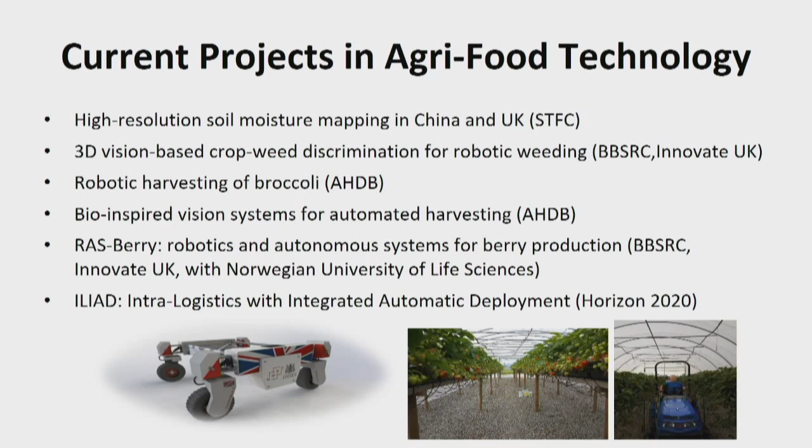Let's look at how this technology might develop and where it can go. One of the underlying questions fundamental to this research is, can we make our agriculture more efficient and sustainable? We're faced with a growing worldwide population.

We basically need to grow more food and other crops as well, biofuels and so on, with existing resources, and we need to feed a growing population. So how do we do that? How can we scale up the agricultural systems we have now to produce more with the current resources?

Well, to try and look to the future, it's good to look to the past. If you look at the development of agricultural machinery, it started off in antiquity with the invention of the plough, and that was pretty much the state of the art for thousands of years until the Industrial Revolution, and then came along steam power, and then we got to tractors.

The trend in recent years has been towards bigger and bigger tractors. This is the way to scale up the technology, to build bigger and bigger machines. But there are a number of issues with this.

Soil compaction is one issue. Reliance on fossil fuels is another. So is this really a sustainable long-term solution?

Well, together with a number of colleagues that I see sitting in this room, we think there is an alternative, and that's to build autonomous robots. So rather than scaling up by building bigger and bigger machines, you could have a fleet of more and more smaller robotic systems which could function off electric power, which could potentially do the job even more efficiently.

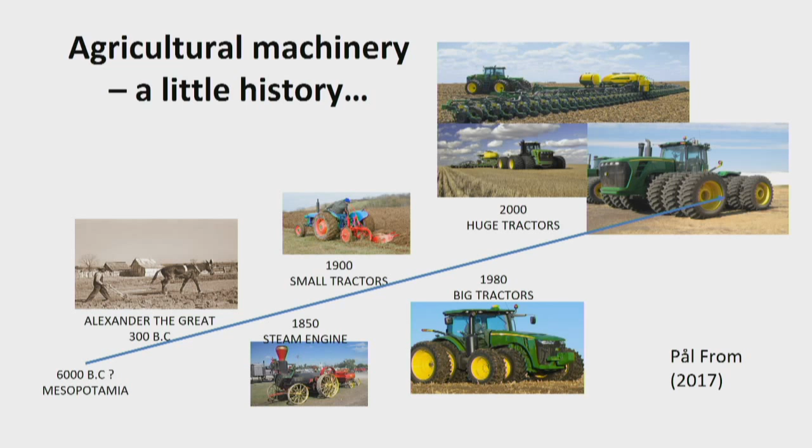Just to mention how this is going to come about, the technologies I'm going to talk about today require platforms to run on. So probably the closest route to market would be to basically retrofit existing farm vehicles. Colleagues at Harper Adams University have been very successful and are very good at retrofitting, at roboticizing farming vehicles. And this is an example.

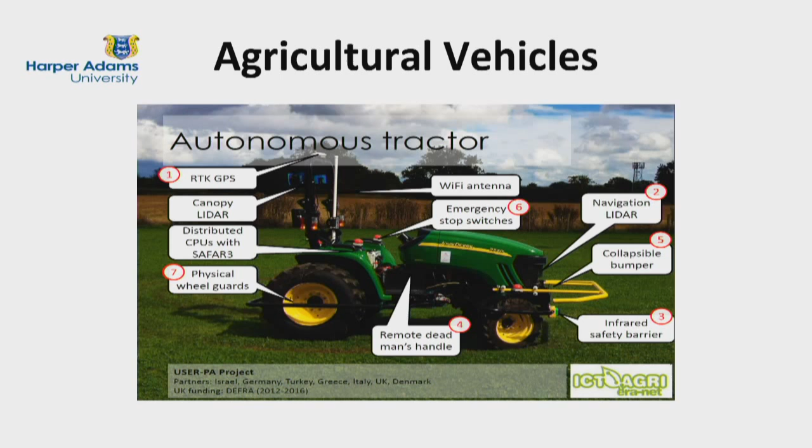It's one of your slides, Richard. I'm not sure from a recent presentation of an autonomous tractor. So I think in the short term, the robotic technologies I'm talking about tonight will be deployed primarily on existing farm vehicles, tractors, sprayers, or whatever.

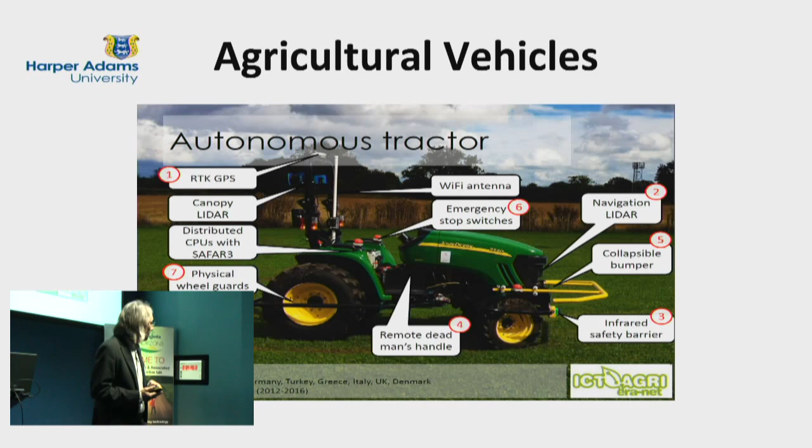In the longer term, I think we can also see something like this. This is a lightweight, electric-powered mobile robotic system. It's one that we're working with now at the University of Lincoln, and it was actually developed by our colleagues at the Norwegian University of Life Sciences.

This is work done by Professor Pål From, who's now a part-time professor at the University of Lincoln, as well as a professor in Norway. I'll just show you a couple of videos of our robotics platform, which is called Thorvald, just so you can see it working.

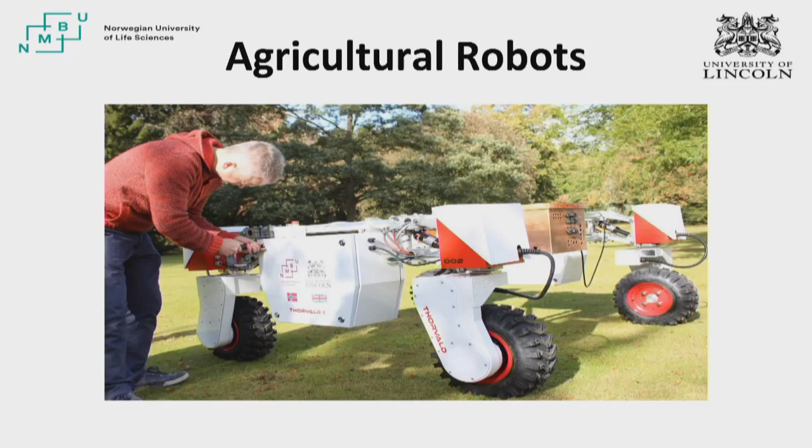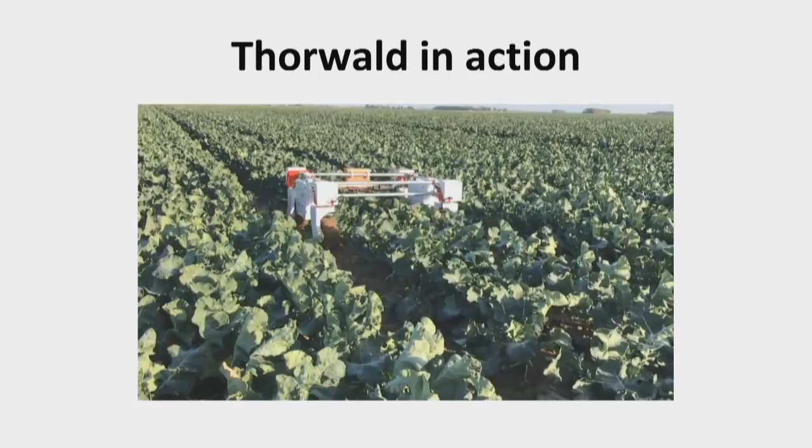So basically, this is a mobile robot. It has a battery life of around 12 hours at the moment, but that depends on the payload and the operations you're trying to perform. It has 4 independently powered wheels, and there you can see the robot in the field. Is that broccoli? It looks like broccoli to me. So there you can see the mobility of the platform, and there's actually a similar sensor to this one mounted on the front to do some measurements.

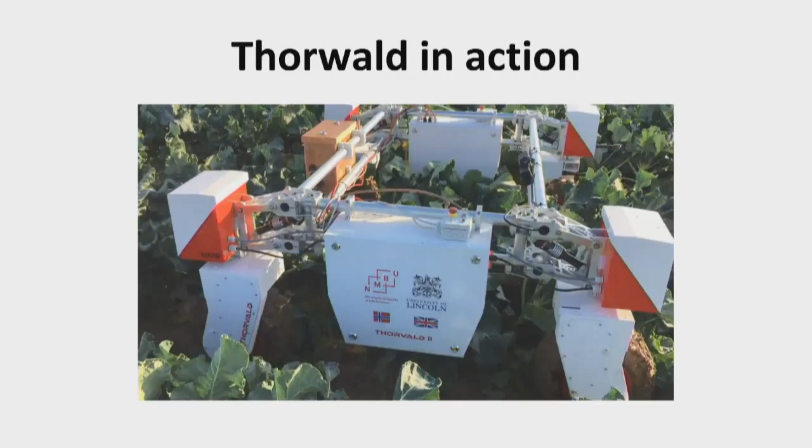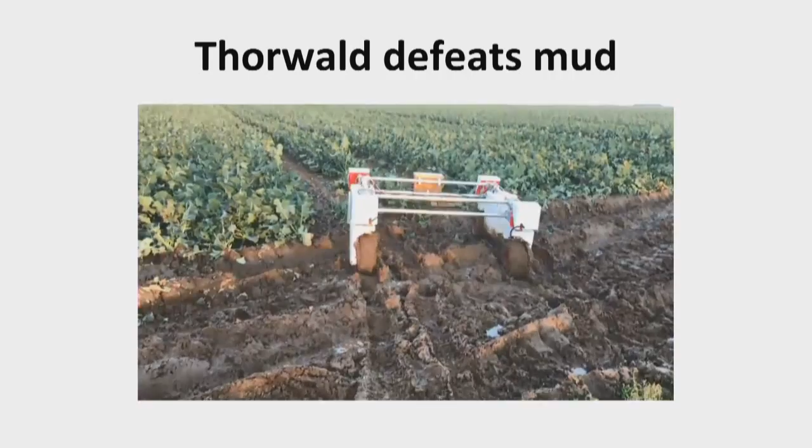Let's go to the next slide. This is quite a good indicator of how the system will deal with very muddy conditions. This is a field somewhere in Lincolnshire. The system is quite manoeuvrable and is able to cope with quite severe levels of mud.

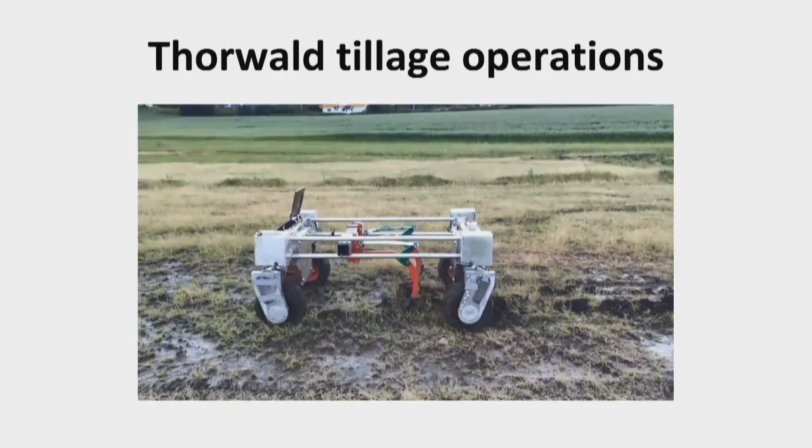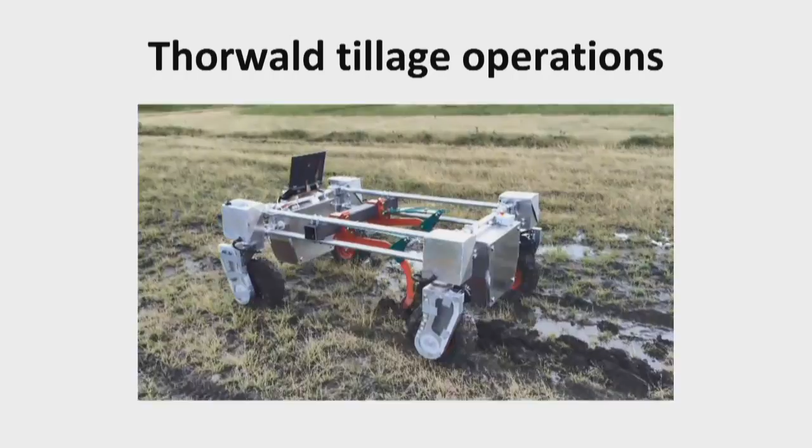In fact, I've got another video from Paul in Norway. This one was filmed recently, and there's a robot doing some tillage operations. You'll notice the conditions there are rather wet. In Norway, they apparently have a 2-month growing season, and it rains nearly every day.

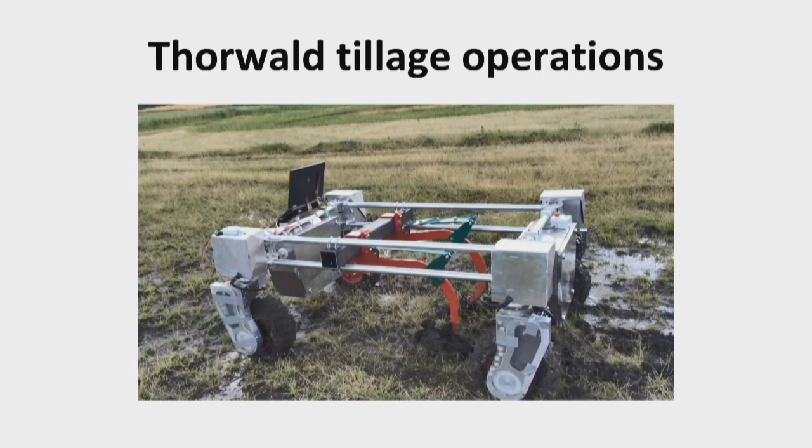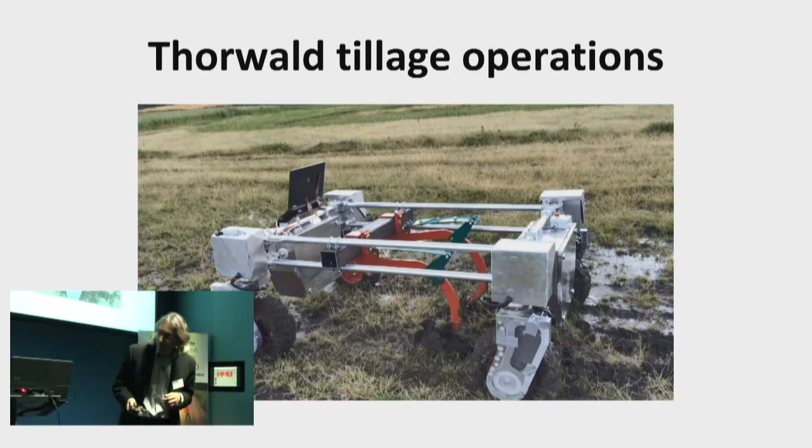Finally, just to illustrate the payload, we're told our robot can carry 200 kilograms. I'm not sure exactly what the payload is here, but we got two of our colleagues to sit on the robot, just to show you that it's quite robust and reliable as a system.

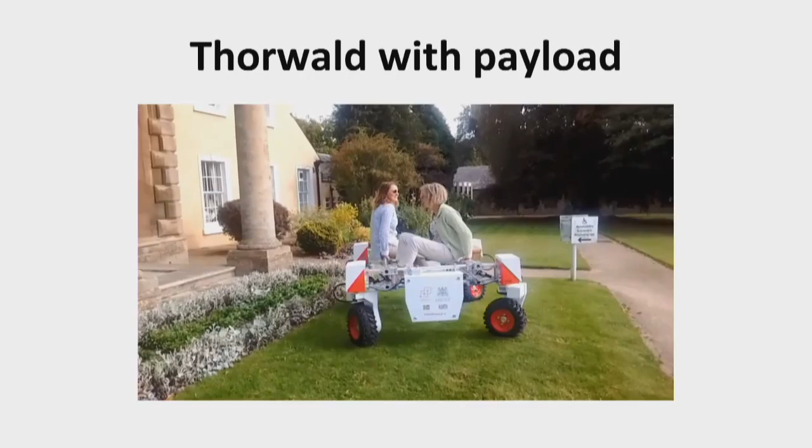Okay, so that's our robot Thorwald. Try to remember what's coming next. So Thorwald is a nice piece of hardware.

It's got great electronics, and some onboard controls, fairly low-level, for example for controlling the 4 wheels together. But all of the demonstrations you've just seen had high-level control done by a human with a joystick, someone standing there driving the robot by hand.

So if we want to make the robots autonomous, we need software. Hardware and software are the two sides of the coin in robotics. You need mechanical and electrical engineering to build the hardware platforms, but then you need computer scientists to do the coding and develop the software to make the systems autonomous. That's where I think robotics can add something to the agricultural world.

Basically, all autonomous robot systems operate on a sense, think, act cycle. They have sensors, like the one I showed you, to interpret and make sense of the world. Then they have to do some thinking, reasoning - it might be decision making, it might be planning, working out the sequence of actions needed, for example to remove a weed or reach a certain point in space. And then they need actuators, motors and implements, to actually carry out the motor commands.

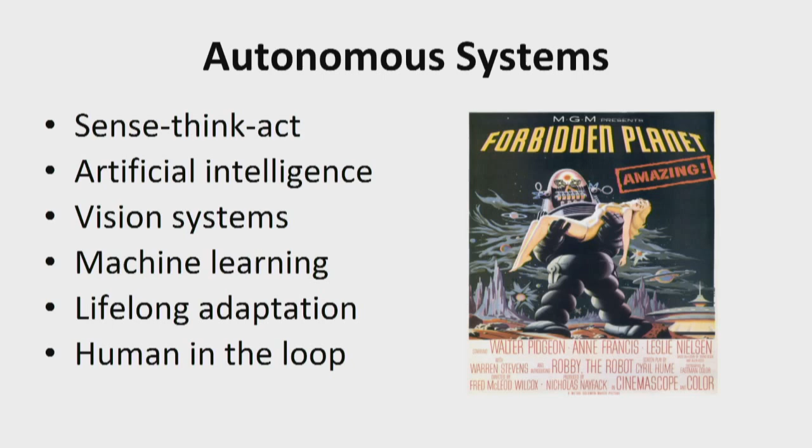But as I said earlier, I don't think we're going to be looking at fully autonomous systems anytime soon. I think for the next generation of farming robots, there will usually be a human in the loop somewhere. You may have heard one of the buzzwords going around at the moment, Industry 4.0, or Farming 4.0, which is supposedly the fourth industrial revolution. They talk about cyber-physical systems, meaning systems that contain a human element and a robotic element. So I think this is the future of agricultural robots—will involve robots, but also a human in the loop somewhere.

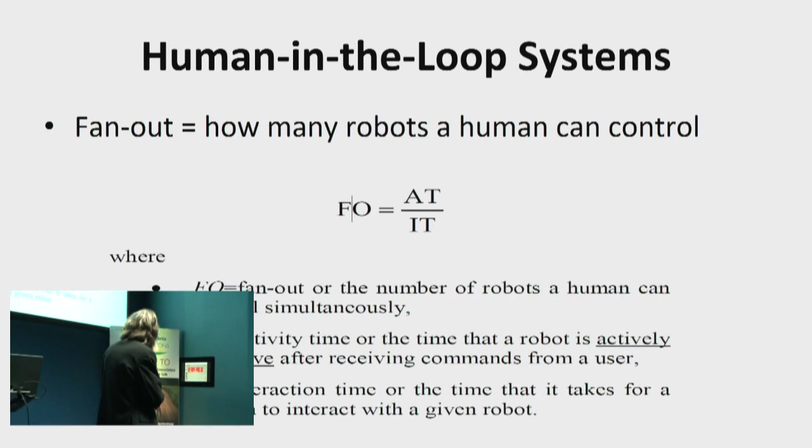I was told you shouldn't ever put equations in a presentation like this, but, well, sorry. One useful concept is Fanout, which means how many robots can a human control. There are a couple of factors that can influence this.

One is the activity time, the amount of time that a robot can run without assistance. If you can increase that, then you increase the fan-out, the number of robots that a person can control. But the more time you have to interact with the robot, the fewer robots you can deal with.

If you look at some of the currently remote-controlled systems, like drones in military applications, they actually have a very low fan-out—they need more people than robots. But I think in the future you're going to see robots with a much higher fan-out, so one person can potentially control many robots. We need this, of course, to scale these systems to work on a higher volume.

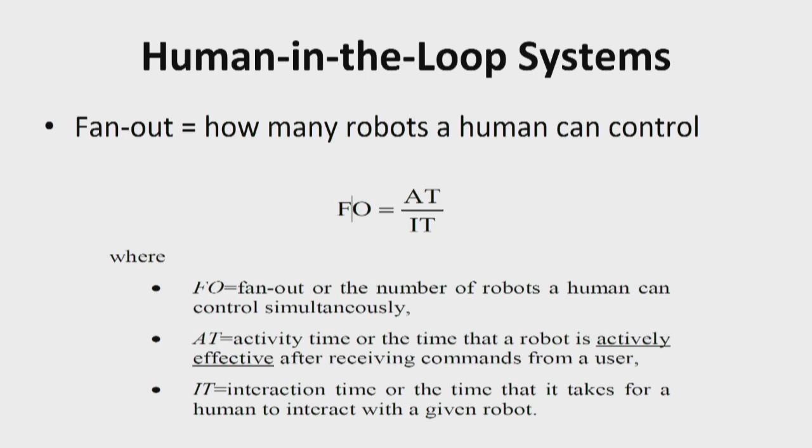Hopefully I'll give some examples and motivate how we can possibly do this in robotics for farming.

I'm going to talk now, to illustrate some of this stuff, about some case studies and some of the projects we've worked on in the past few years. The first one I'm going to talk about today is robotic harvesting of broccoli.

Broccoli is an interesting crop because it's harvested selectively. Some crops undergo slaughter harvesting, where you basically make a binary decision—you either harvest the whole field or you don't. But with selective harvesting, you might make several passes through the field, and you only harvest the crop when it's ready, when it reaches a certain specification.

These people literally use their left hand to hold the broccoli, the right hand has a big knife. They'll check the specification of the broccoli—basically determined by the supermarkets—is the head within a certain size range, a minimum and maximum diameter? Then they'll cut the crop and put the cut broccoli head onto a conveyor, and it will go into the back of the tractor. Currently you typically have one person driving the tractor, and then a gang of 6 laborers.

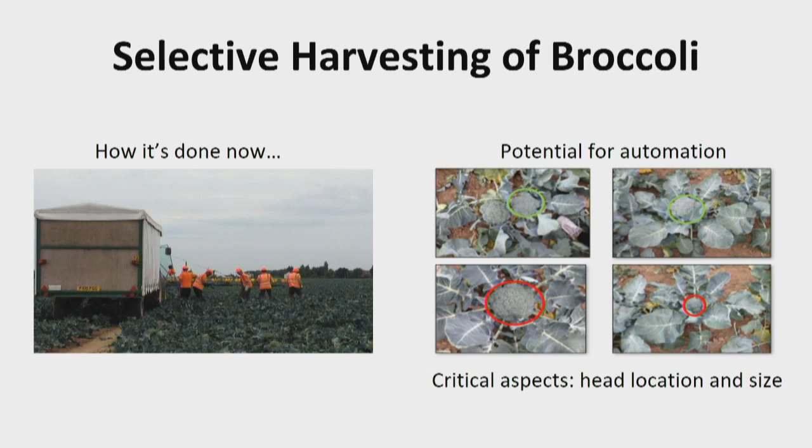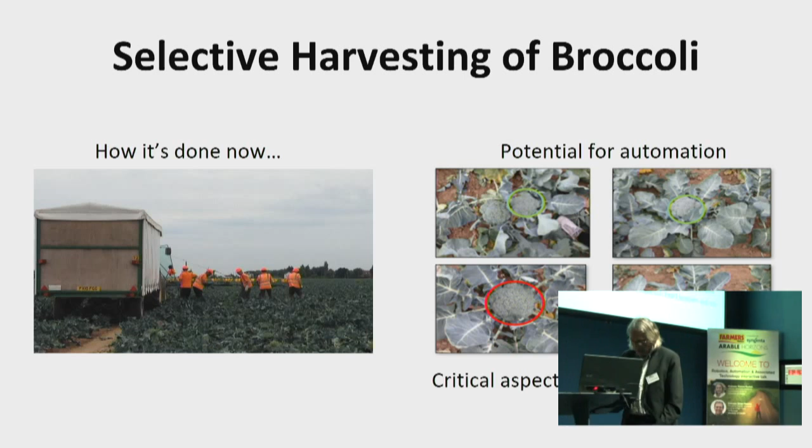The things we're interested in detecting with our vision system: we want to detect the broccoli, the location and the size. We need the size to make the decision of whether it's ready to harvest, and the location to ultimately control a robot to cut it. So can we automate this?

I'm presenting here some experiments where we basically put a similar sensor to this one on a tractor. We built a kind of enclosure—a box with some material that prevents too much infrared radiation from the sun getting in, with some lighting inside. In the picture on the right, this is a field in Lincolnshire somewhere with the apparatus on the front, and we recorded data from the crop at various stages of growth.

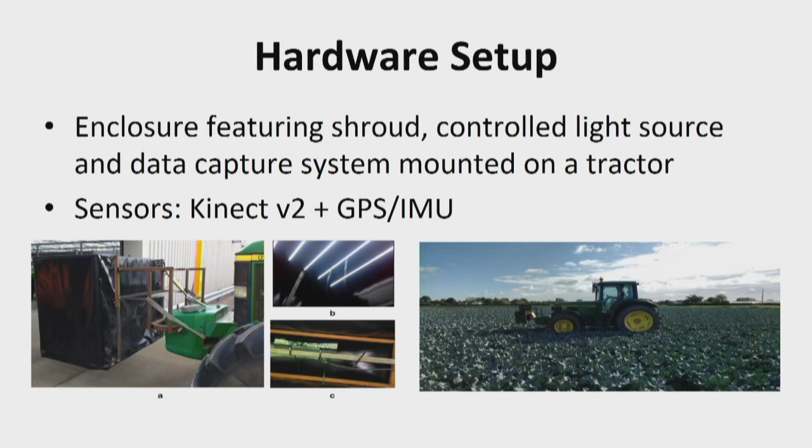Broccoli is interesting for us, not least because it has different growing seasons in different countries. In the UK, broccoli is a summer crop, but in Spain, it's a winter crop.

So of course, as researchers working on this, we had to do a field study and go to Murcia in Spain to do some experiments and collect some data there as well.

For the trip to Spain, we changed the setup a bit. We put the light box on the back of the tractor so we could mount it with a standard 3-point linkage, but otherwise the procedure was the same. We collected sensor data with this system so we could develop our algorithms and work with the 3D sensor data recorded in the field.

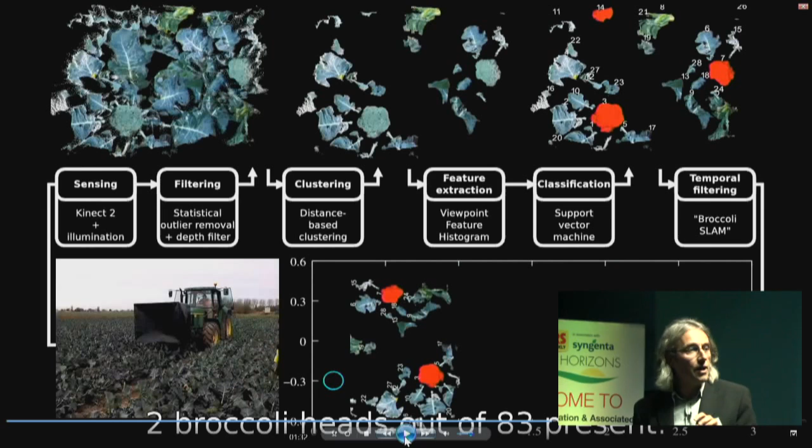This is the image processing pipeline - how we process the data and end up being able to locate the broccoli plant. We do some filtering on the data, removing noise and things. We also have a depth filter, very similar to the people tracking system - we need to identify where the ground is. Anything below a certain depth we assume is the ground, and we remove it.

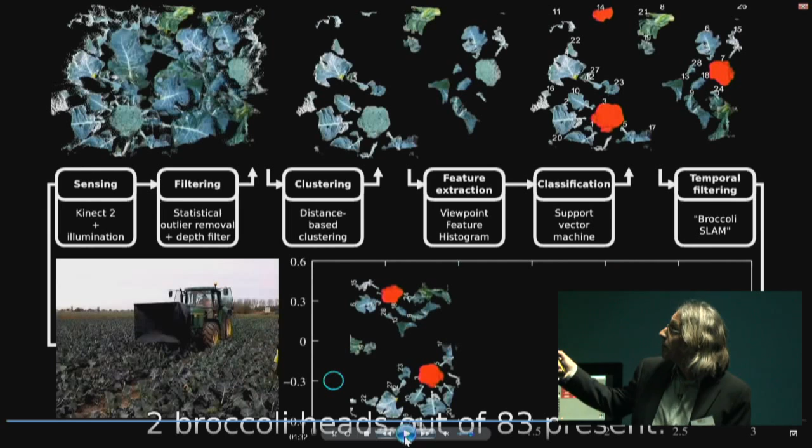What we do with the points that are left is group them together, or cluster them, so we get some blobs of stuff. In the second image, you can see the ground's been removed, and we're left with a number of blobs, or objects. We've removed the smaller ones, too small to be a broccoli. We're left with these blobs, and we have to decide: is it a broccoli head or is it not?

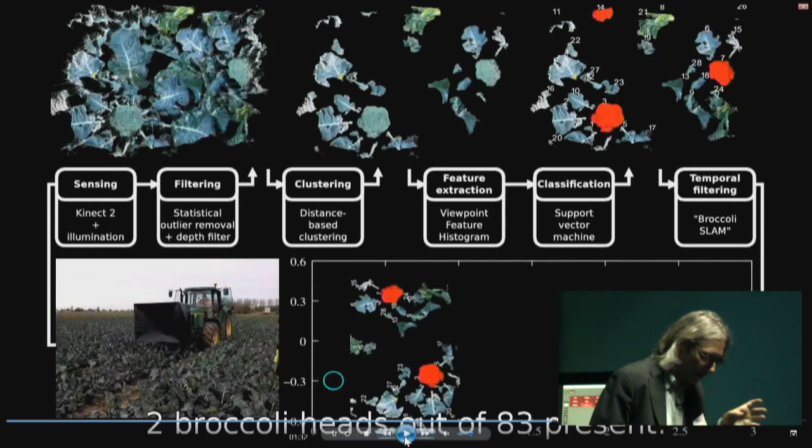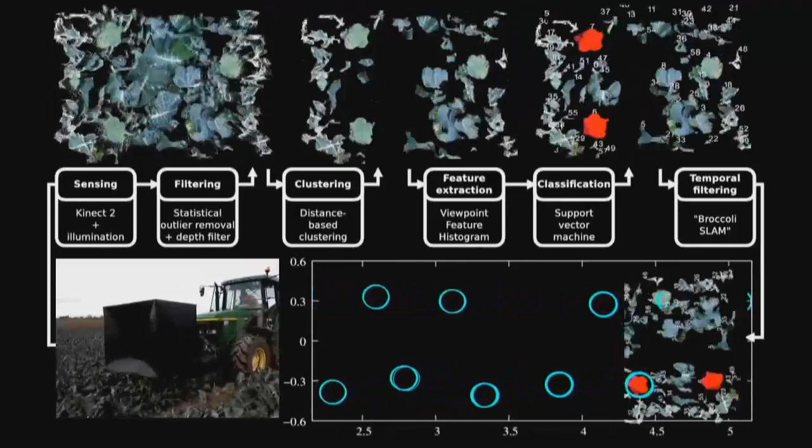If we can just start the video, please, you'll see the way the system works. On the top left is the feed from the Kinect camera, with the different steps of processing. You can see the floor removal and the classification, and at the bottom we can see the results of the tracking algorithm - we're able to track the location of the objects and build a so-called map.

Here you can see it makes a few mistakes - there's a double detection there, but overall it works pretty well. The final output of this system is a geo-referenced map, if you like, where we know which broccoli have been detected and where they are.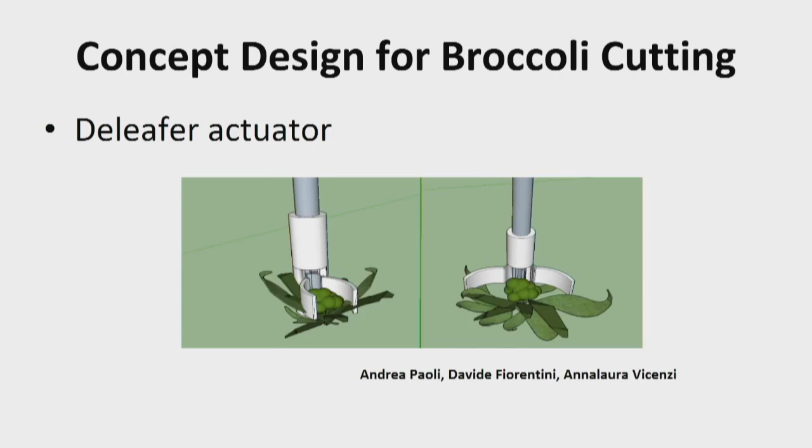We can see here, step one is an actuator to remove the leaves. Step two is another actuator to cut the crop and also remove it. That's the hard bit, actually.

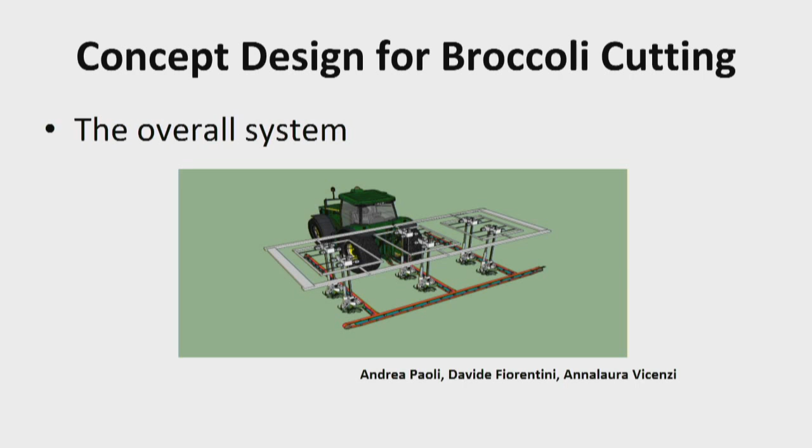And then you can see a concept design for a system there where you've got a large number, well, 6 of these robots mounted on the back of a tractor. So there you're going from a system where you've currently got one person driving the tractor and 6 workers. Potentially you could really increase the productivity of the workers, because now you only need one person to drive the tractor. Yeah, so ultimately, of course, the tractor could be driven autonomously as well.

So there you go, that's the work we've been doing on broccoli harvesting. There's one thing I didn't tell you about that system: the hard bit is the training. It actually took one person 3 days to train this system, and it was a sixth former, a farmer's son from Lincolnshire, who came in to do work experience.

In other industries, you do work experience, you sweep the floor, you make the coffee. In robotics, you come and do work experience in a robotics lab, you do data annotation. So Adam had to sit and look through hundreds of 3D images and point out the broccoli plants, and all of that data was used to train the system.

So if we want to make these systems really useful, we need to simplify and make this training process easier. One of the pieces of work we've been doing at Lincoln, ongoing work, is to make trainable vision systems. It's really important that there's a human in the loop and the human's able to train the system, so you don't need a computer scientist to come to your farm to set it up for a new task. Ideally, the system should be trainable on the farm to work with a new crop or a new setup, whatever it is.

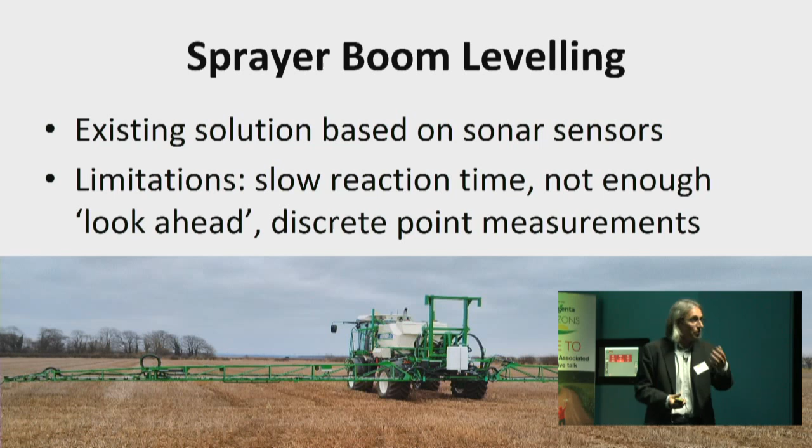This is another project to demonstrate that we can do robot control as well. This is an example of a sprayer with really long sprayer booms spraying treatments onto the crop. Current systems have to try to level the sprayer booms to keep them at a certain height above the crop. If the height's too high or too low, the process becomes inefficient, and you can get drift of chemicals into other fields.

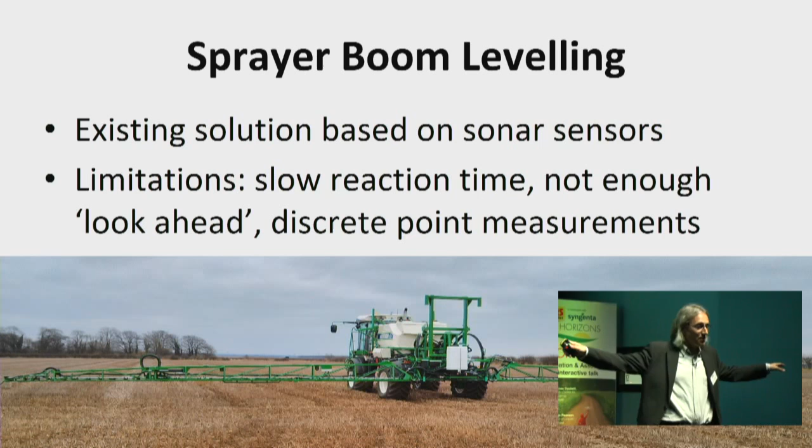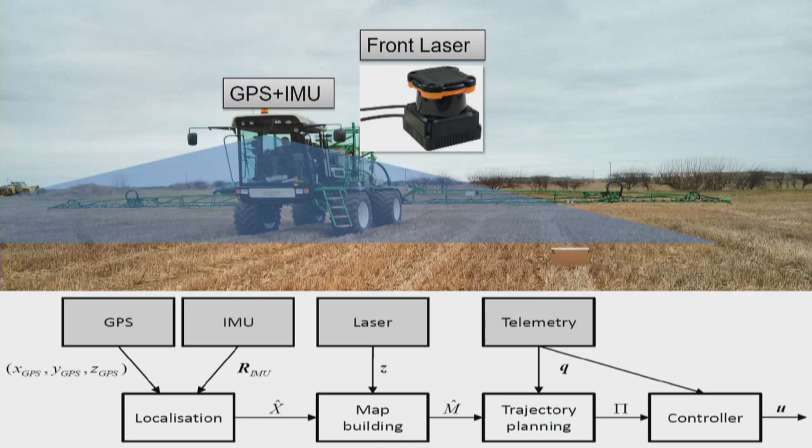So the problem is that's a really difficult control problem because it's a great big mechanical thing that's sort of balanced on like a pendulum. So what we did to solve this is we put a laser scanner on the front of the cab of the sprayer. It's a 2D laser scanner that's scanning a line about 10 meters in front of the vehicle, and we're using that to build a scrolling 3D model of the scene, which we then use to plan trajectories and control the arms or booms of the sprayer.

So we get a very accurate 3D model of the scene, and we're able to use this to develop a robot controller. We have a model of the system we're trying to control — this is the kinematics, or the physics, of the sprayer boom — and then we do trajectory planning. So we look ahead and plan how to move the sprayer booms to avoid any bumps in the ground, or move up and down depending on changes in the terrain or the crop.

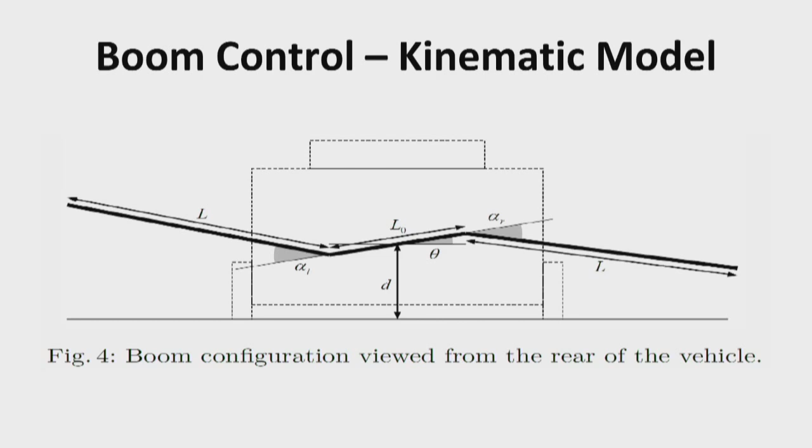So I think that's my third example of a project, and that's ongoing work. Finally, I'll just mention a few other projects that we're doing at University of Lincoln right now.

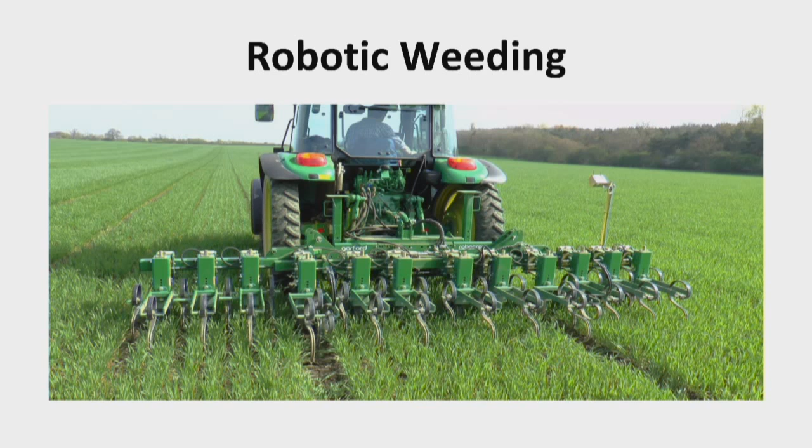So we have a project on robot weeding, with a company called Garford Farm Machinery, who are world-leading experts in building vision-guided hoeing systems. It's great because I can tell people I work on robot hoes. This is basically a camera-guided robotic system for removing weeds mechanically, so there's no spraying going on — that's the kind of thing we're working on now. They've been doing this very successfully for 20 years, and we're now helping them develop next generation systems that will use 3D sensing and so on.

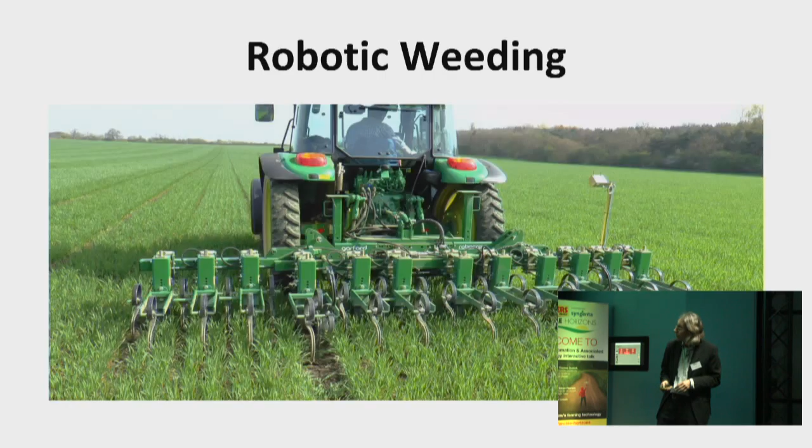Just to mention other streams of work, we're working on logistics. The mobile robots that I work with are really good at one thing, and that's getting from A to B — so why not use them to carry things and move them around? We do work on both in-field transportation and logistics as well.

Just to highlight a new project we've just started at the University of Lincoln, together with colleagues from the Norwegian University of Life Sciences and Berry Gardens, a major company there — we're building an in-field transportation system for strawberry production. So we're not actually trying to do what it said in the Financial Times the other day; we're not trying to pick the crop.

What we're trying to do is assist the humans picking the crop by carrying the boxes of strawberries. The way these production systems work at the moment, the skilled pickers are actually spending between 20 and 40% of their time carrying boxes of picked fruit from A to B. That's something a mobile robot could do just as well, we think. So we're trying not to replace the humans, but to work alongside them, so the humans spend more time picking and the robots spend their time transporting the crop.

We're going to be building — well, we've got some polytunnels going up at our research facility at the Riseholme campus, and we're going to be working on that system there. This system will use some of the technologies I showed you earlier, like the people tracking technology, because if you're going to work alongside people in an environment with humans, you need to know where the people are and not kill them.

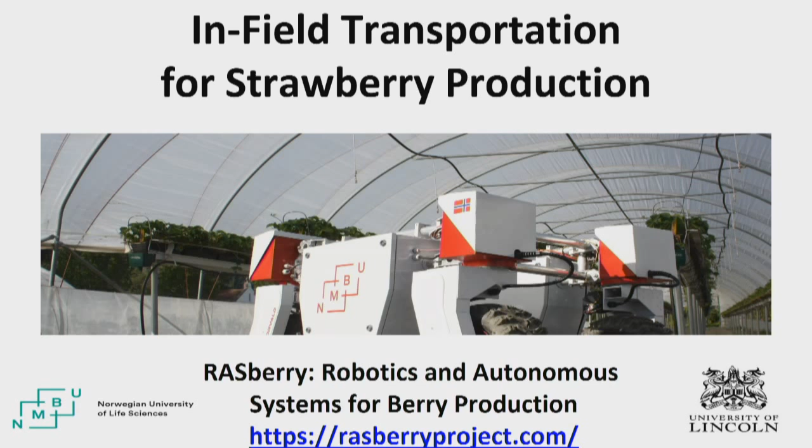Last but not least, we've got a new European project with a number of partners to develop similar technologies, but for warehouses. We've got a project with partners from Sweden, Germany and Italy to build the next generation of warehousing systems — we're building, if you like, smart forklift trucks. Again, this will be an environment with a mixture of humans and robotic systems working together, and we'll develop software to make these forklifts aware of their surroundings and what the people are doing, able to work together with people to increase the productivity and efficiency of warehousing operations.

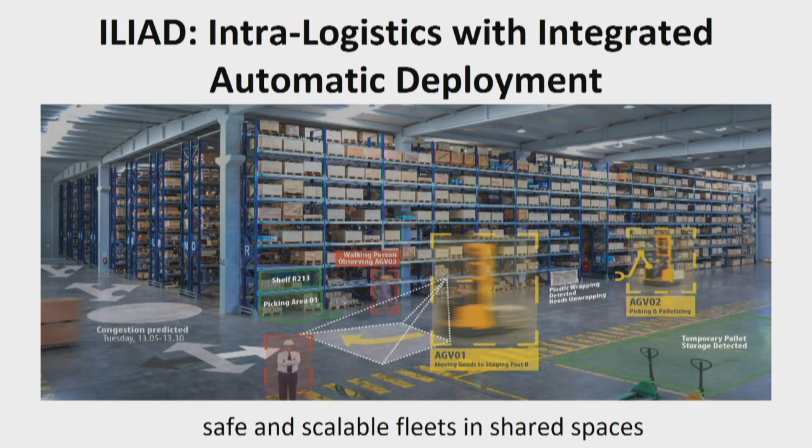Okay, so that's the end of the case studies I wanted to present. Just to mention briefly other strands of work that are ongoing, and new things I didn't have time to mention - we've always been interested in robot mapping. We want robots to be able to map anything, know what the stuff is and where it is in the world.

I think there's a general trend, especially for crops like vegetables and beets, to go towards per-plant operations - being able to identify and measure properties of individual plants, and then use this for applications like selective spraying, weeding, and selective harvesting, some of the examples we talked about.

As well as monitoring the health and quality of the crop, there'll be increasing interest in future on monitoring the quality and health of the soil as well. So we've got projects, for example, measuring soil moisture, as I mentioned.

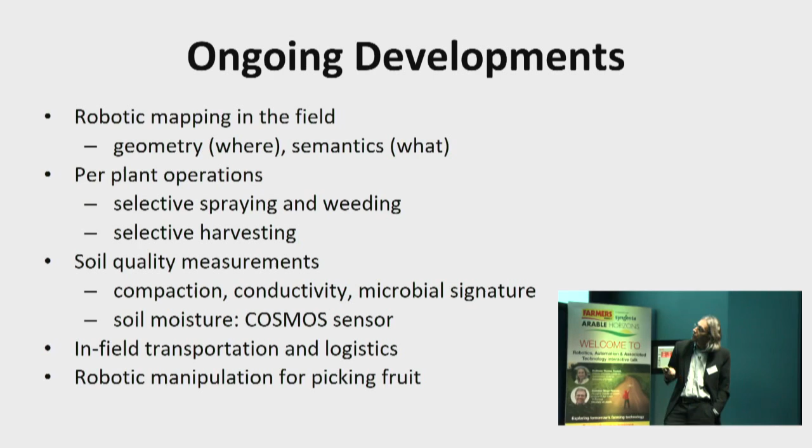That's my timer telling me I've run out of time, so I'll finish off. We're measuring other soil properties too, like compaction, conductivity, microbial signature. We're also working on in-field transportation logistics, and we've got new projects starting in robotic manipulation for picking fruit, with a new colleague, Professor Gerhard Neumann, a specialist in robotic manipulation.

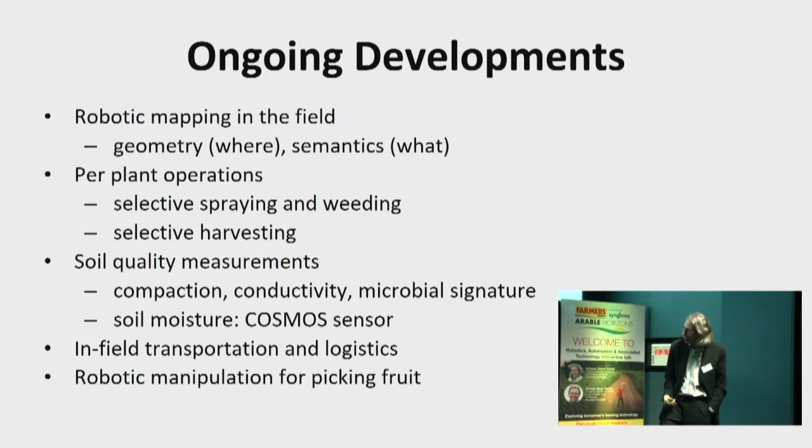As I said, I think these systems will be deployed firstly on existing agricultural vehicles, but longer term we can hope to see smaller robotic systems that will do some of these tasks. And hopefully we can get from the general purpose tractor to the general purpose robot on the farm that can do lots of jobs.

So for me, as a researcher in computer science and autonomous systems, I think they're an excellent enabling technology for precision agriculture. I think it's important to note, however, that robots and humans are good at different things.

So I don't think it's a case of robots replacing humans - it's a case of robots helping humans become more productive and hopefully providing more interesting work for them as well. So I think we'll go from agricultural machines to robot co-workers. It might be that the farmer of the future is something like a shepherd with a flock of robots.

I think, however, we're not going to see full autonomy just yet. It's very important that we have a human in the loop, especially if we need someone to train the system or to supervise and look after it. So, for example, the person driving the tractor on the farm might also be the one training it to recognize broccoli, or whatever the job may be.

I think it's essential that all of these systems are able to self-improve, to learn from their experience. That's really key, I think, and that's the glue that holds all this stuff together. I think that's a really core thing that we as computer scientists need to develop for agricultural robotics systems to work. So that's just about it.